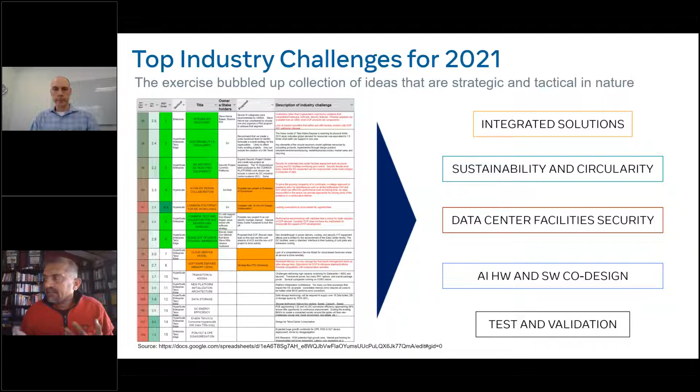So the 2021 exercise led to the following areas. We identified developing integrated solutions as one of the areas where the community should work, because OCP adoption is very important. Sustainability, circularity, and then data center facility security, and a few others. I'm here to talk about sustainability and circularity.

So the main goal here is that we want to move towards science-based targets for alignment with the Paris Agreement and try to build sustainable data centers which are aligned with the global protocols. That's the bottom line. Because when you look at carbon emission, data centers are one of the big carbon emission contributors for any of the companies which are running these data centers.

So carbon emission is identified as scope 1, scope 2, scope 3, which are just 3 different ways in which company operations lead to the bottom line of the carbon accounting which the company is responsible for, and running a data center operation becomes one of the big factors.

So the idea which we are pushing with OCP sustainability and circularity is, first, we are in the first year of getting this launched, so we want to start promoting awareness about this particular area. Many of you attended the OCP summit last week, and sustainability was front and center. This is in great part due to the work which this work stream has done. Next, we actually want to start doing something concrete.

We want to identify key steps in component design which basically make products reusable. So let's say you are designing a timing card: can we make sure that we follow certain design principles which make this timing card life cycle longer than 3 to 5 years? It can be reused in many areas, right? That leads to a lower carbon footprint.

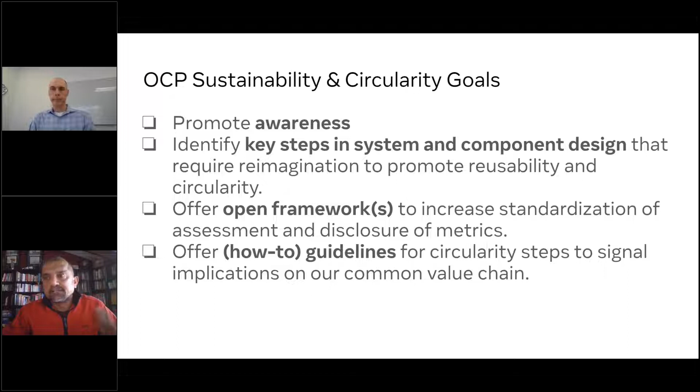And then we also want to look at the way we do the measurements itself. Life cycle analysis is one of them. Hardware efficiency analysis is another one. So these are all the goals which we are working towards. And in 2022, this is going to become a full-fledged project. So, OCP sustainability and circularity initiative milestones.

In 2021, we started the work, and then we went through the whole year leading to a big launch at the November summit, where over 14 presentations, multiple panels, and companies from Google, Microsoft, Meta, and everybody else were involved in presenting their outlook, right? So that's one of the areas which we worked on.

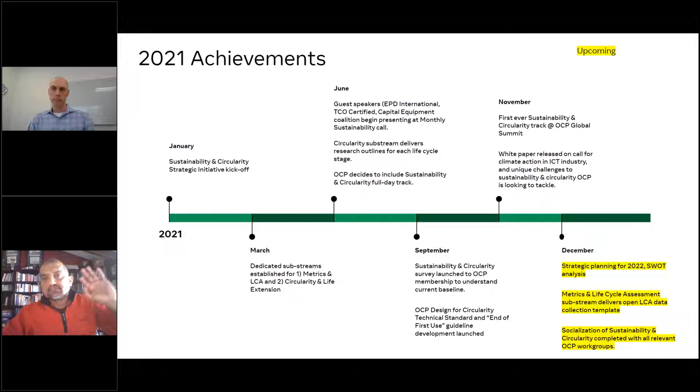And then in 2021, we also launched 2 substreams. We launched measurements and LCA analysis in March, and we launched life cycle extension, which is a way to prolong the life cycle of components, right? So one is how to do the measurements, and the second one is how to make things more circular, and that's what we are working on. So I won't go into this, but this has already happened.

We also published a white paper, which is another first for OCP. This is the first time a sustainability-centric white paper has been published in OCP through the work of a collection of companies. And we are also working to talk to all the project streams across OCP. As you can see, for timing appliance, I've given my name, and we have already completed a whole bunch of conversations with servers, security, rack and power, etc.

And again, the goal is we want to form a tiger team which has cross-project representatives, so that sustainability becomes a very fundamental aspect which all of you think about every time you're thinking of your design. You could be thinking about it in terms of making things circular. You could be thinking about how we can do the measurements which can help in sustainability. So those are the things which we are looking at.

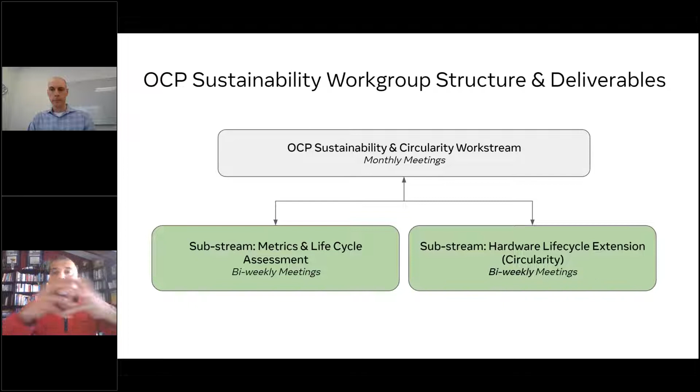And then very quickly, the overview of the work stream itself. As I said, there is metrics and life cycle assessment, which happens every 2 weeks. Similarly, we have a circularity work stream, which happens every 2 weeks. And then we have an overarching monthly meeting which brings everybody together. So it allows for cross-pollination across all of them. And each of these work streams has specific goals and objectives which we are working towards.

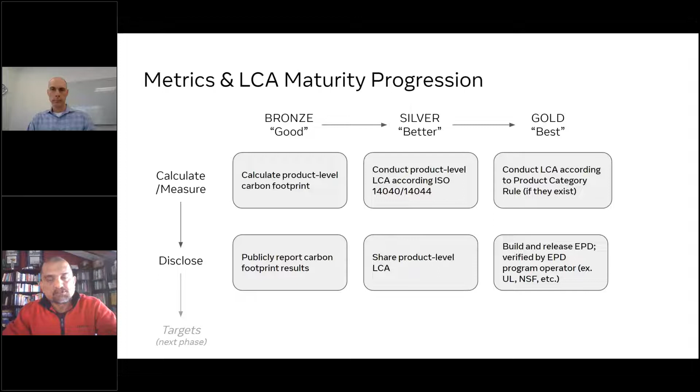And eventually, we want to bring sustainability in as the 5th tenet within OCP, which will be a very big step for OCP. As all of you know, OCP has had 4 tenets for the last 10 years, and adding a 5th tenet is not trivial. But we feel very strongly that bringing sustainability in as a way to measure all contributions is very critical, and that makes everyone think about it. So in 2022, that's one of the goals we are trying to achieve.

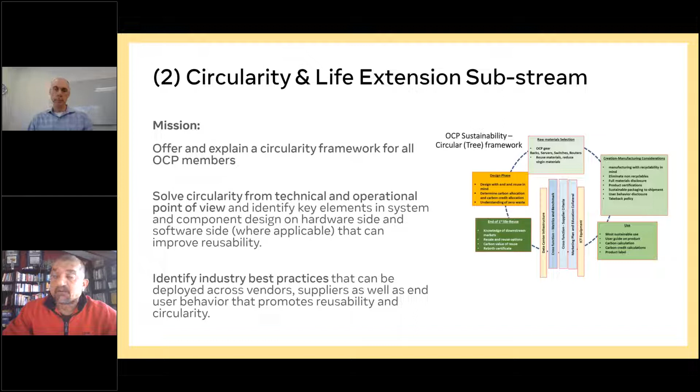And then we have certain goals on each of these work streams which we are already working on. And the idea again is that we want to start forming a tiger team from each of the projects which are running, so that we can collectively start feeding sustainability as a core idea across projects.

And also anything which we are working on, we can take advantage of the knowledge which you have to see if there are things you could contribute into it. How do you do a better measurement, or how can you do extension through circularity? Perhaps we can leverage that cross-functional knowledge. So that's basically what I wanted to share.

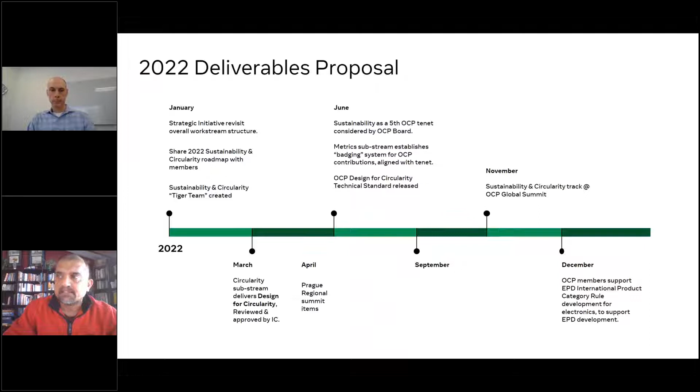We also have a goal for 2022. As I mentioned, we are planning to make sustainability our 5th tenet, presenting it to the board by the middle of next year, and then work longer term so that we can all achieve net carbon zero by 2030, as many of the organizations have. So I wanted to stop here.

I wanted to take this opportunity to share that this particular work is happening in OCP. It's a cross-functional work, meaning it's not a work like server, which only deals with server design, but this is sustainability, which is like security or hardware management, which spans across all of the project areas. So I wanted to take no more than 10 minutes. I'm going to pause here and see if there are any questions.

Thank you, DJ. I have a question. Can I ask a question? Yes, absolutely. Go, Hisham.

So what is the relationship between sustainability and the TAP project? Are you talking about how the TAP project can reduce energy consumption, for example? How you develop the board or the card? What technologies you put into it?

Hisham, this is more like we're advertising all our sister projects in OCP. This is a project adjacent to, let's say, TAP, the same way we present TAP in other OCP projects. Exactly, because not many people know about this project, just like not many people know about TAP.

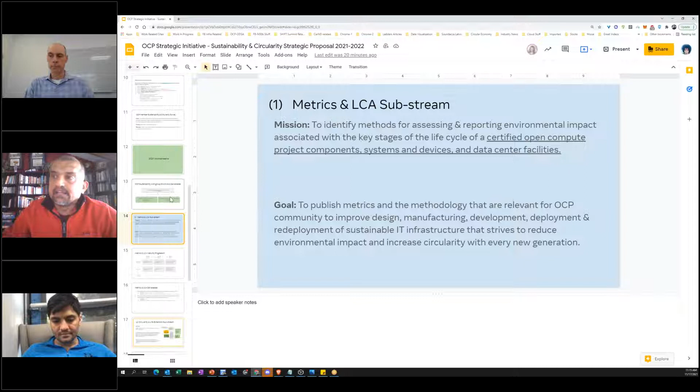And there could be ways in which, for example, TAP can provide technology into a server or a networking device. Similarly, sustainability can be considered in the design of TAP-centric products. And it is not just related to energy consumption. As I mentioned, currently there are 2 substreams. One is how do you do measurement? Simple as that. There is no improvement discussion, just life cycle analysis measurement, or efficiency measurements. That could be discussed even inside TAP.

And the second is, how can we extend the life cycle of various devices? These devices could be servers, networking switches, timing cards, which you guys are building, storage servers, or OEM. For any of these devices, how can we go from a 3-year life cycle to a 5-year life cycle, or make it reusable? Meaning, when one company or one data center decommissions gear, how can it still be productive in a second life with another set of customers?

And for that, a lot of things have to be thought through in terms of how the firmware transfers, the certificates, security, ownership, because sometimes devices in one data center have software or firmware running on them which is very customized for that data center or that particular customer. Now, when you decom that gear, how can somebody else take advantage of that hardware when they don't have access to the same software or firmware? So those are other areas we are looking at solving. So it's not just about energy.

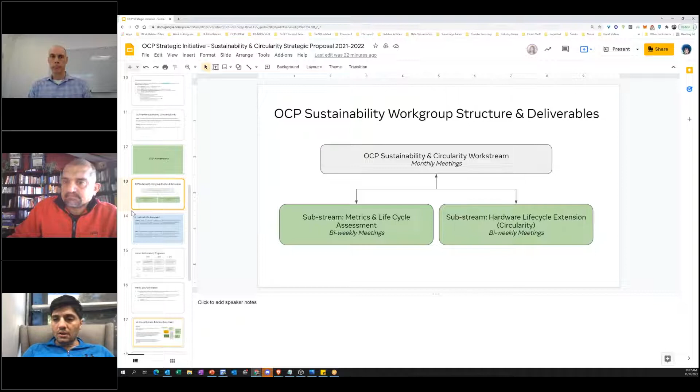So let's go to our third item, where Georgi is going to talk about the API workstream. Georgi, let me make you a presenter. Okay, Georgi, you are the presenter. Your audio is muted. Okay, now it's open. Am I the presenter? Yeah, you are the presenter. Okay. Let me find the slides.

Okay, can you see my screen? Yes. And let me find how to get rid of this. Oh, okay, I think that's good. Wonderful. Let's do it.

So this is going to be really, really short. I had a presentation at the summit. You can go back and look at the presentation. But the goal of today's short announcement is focused mostly on the API side.

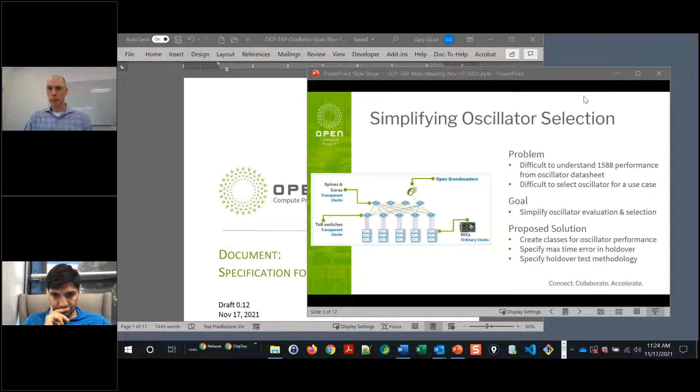Okay, thank you. Can you guys see my screen? Yes. Awesome. Hold on, I need to move the GoToMeeting stuff out of the way. Okay. Minimize, yeah, good. Is it showing as a black box over my shared screen or no? You can see that, okay. It works, yeah. It shows your desktop too. Only on the bottom, right? It doesn't show the GoToMeeting controls. No. Okay, can't figure out how to minimize that. Okay, so let me just back up.

The goal of today's meeting is to give an update on the oscillator workstream. This is a workstream with several other participants from the industry, oscillator and other companies that we've worked with over the last 6 months. And the goal here is trying to summarize what we've done and generate interest, and also to collect feedback, not just in this meeting necessarily, but by inviting people into the oscillator workstream meeting, which is Wednesday mornings at 8 a.m. Pacific time. We'd love to have more people contribute and get everybody's feedback.

So today, let's just talk about what we've done. So the agenda is going to be, why do we have an oscillator workstream? And that's going to lead to a motivation for having oscillator classes, so classification of different oscillators for different nodes in the network. And then part of that is not only the specifications which create these different classes, but the test methodologies used for the test specs.

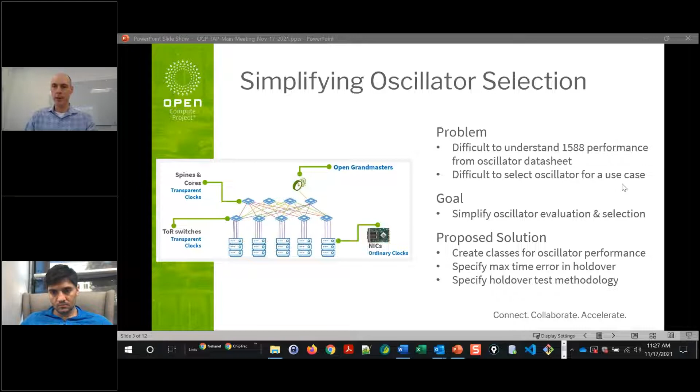It's difficult to select the oscillator class. So we're going to make that simpler by introducing classes for these different use cases. And like I mentioned, not only are we going to create specifications for these classes, but we're going to create specifications for the test methodologies where it's important. And just to give you an idea,

so we have this, I apologize, there's just a lot of GoToMeeting controls I have to navigate around.

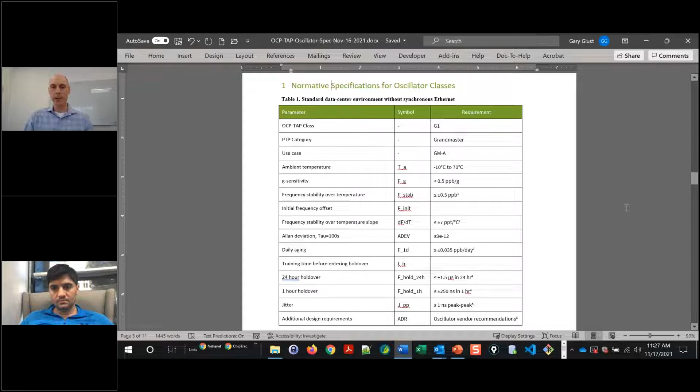We have this document that we're continuously working on, that's the specification for oscillator classes. And part of that document, we have pretty well nailed down that we have a few open items for normative specs for standard data center environment, open grandmaster that doesn't have synchronous Ethernet. And you can see that this is the spec table here, where we call out things like ambient temperatures, frequency stability over temperature, Allan deviation, all the things that you would expect to see for an oscillator specification. And with various footnotes to indicate how these are measured or test conditions.

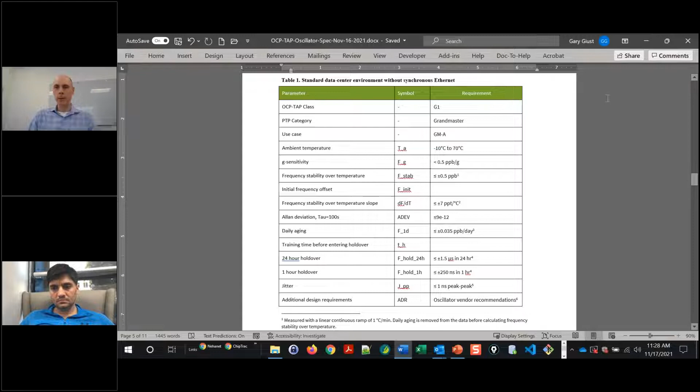Of these test specs, the most difficult to satisfy is the holdover specification, of which there's two. We have a 24-hour holdover spec of 1.5 microseconds and a 1-hour holdover spec of 250 nanoseconds. And it looks innocent enough, but actually when you start digging through what is a holdover measurement and how do you measure it, and we're giving a number here, but there's always going to be some population that falls outside of that. So how do we quantify that? And that leads to the next section, which is the holdover test methodology.

And part of that test methodology is requiring the standard to set different inputs that go into the test method. And we're going to specify those as two separate test specs. One is the test spec for different classes of oscillator. Each one of those classes, which is of course use case dependent, will need to specify what the holdover time is, what the thermal profile for that particular node will see, what the operating ambient temperature would be, what are the ambient temperatures that were required to measure aging and frequency versus time, what is the acceptable probability of error.

So for grandmaster, maybe you require 6 nines, not of accuracy, but 6 nines of the population, so 99.9999% of the oscillators shipped should meet this requirement. And maybe in the ordinary clock, you have a different requirement for the probability of error that the system can live with. But that is very important for us to understand what level of quality we need to ship to. The training time that the oscillator requires before it enters holdover, so that we can get an average frequency for initial frequency offset when we're entering holdover.

And of course, we need to have some sample unit population defined. So we don't want a population of 1. We want something that's higher than that, but not too high that it becomes a burden. So for example, 10 random units for each of 3 lots having a different process and assembly is one recommendation that we have now.

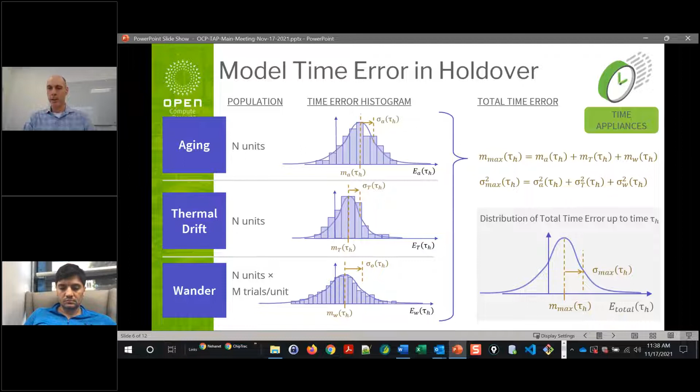And then we can take that equation and we can convert the standard deviation, which is essentially a 1 sigma value, which captures 68% of the population, and we can multiply it by what I call a crest factor, Q of x, and that converts the RMS value into a peak value that allows us to walk down the Gaussian tail and stop in the Gaussian tail at the location specified by the probability of error called out by the class specification for that oscillator.

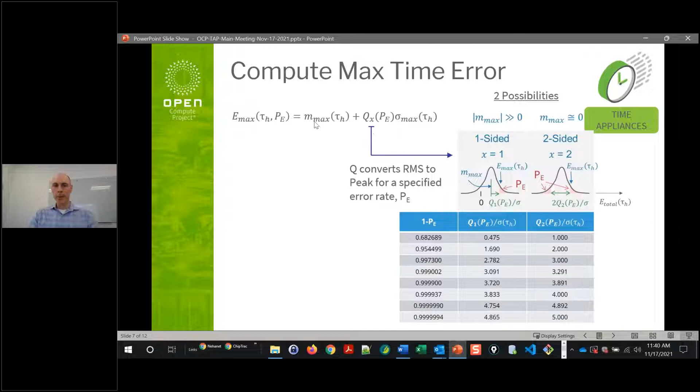But essentially, this is going to be a lookup table based on the probability of error that's called out by the standard and by the particular class. We look up the value. So for example, if the mean is centered around 0, and then we want to look at 6 nines, then we have a value of 4.892. But if the mean of that total error distribution is not centered around 0, then it drops to 4.754. And we simply use that as a multiplier to convert the standard deviation into a peak value that we can then add to the maximum offset, the mean value, and calculate where that Emax value is sitting on that distribution.

The way we would interpret this value of Emax is that, typically in the oscillator world, we characterize holdover on a per device basis. But here, when we're looking at standardizing it, we have to calculate it for the entire product line. So it's ensuring that if we ship lots of units, each one of those units will meet the value of this maximum time error up to and including the holdover time for a given probability of error P sub E. That's really how we interpret that value of Emax.

Now, I wanted to kind of illustrate this in a different light, which is if we're looking at the value of Emax versus time when we're entering a holdover, and this graph begins where we're entering a holdover essentially, we have this dashed line which indicates the mean value of our distribution of Emax. And then on top of that, we can go up plus or minus 1 sigma, and that's these fainter, I guess, purple lines.

But really, we don't want to go out plus or minus 1 sigma because that's 32% error that we're shipping. We want to go out to the specified probability of error called out by the class of oscillator. And for example, and this is just an example, if we're interested in 6 nines of acceptable shipping, 99.9999% of the product need to meet this requirement, then we would go out to this line shown here, and there's a positive deviation as well as a negative deviation. And inside of those 2 solid purple lines, we would call that the window of uncertainty. That with this given percentage of error, 1 micro% essentially of error, we're going to be inside of this window of uncertainty.

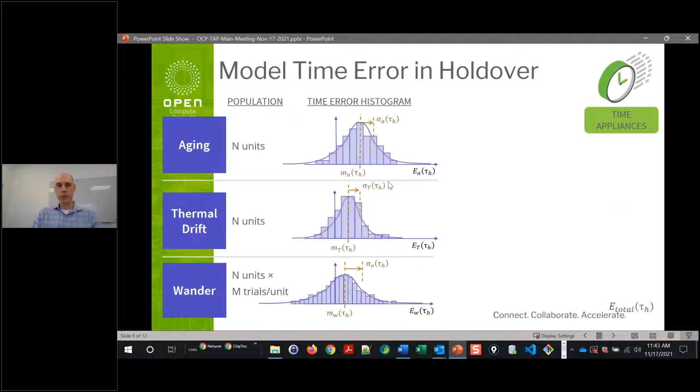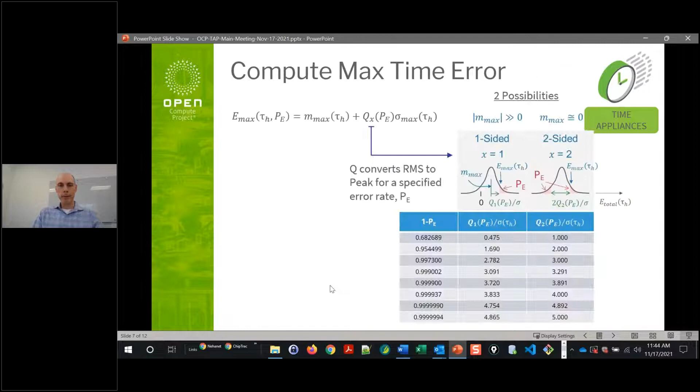So I'm thinking that, and this is really a question for the group here, the way that I started out the discussion is that we're going to specify this Emax value, the maximum time error, up into and including the holdover time, tau h, at a given P sub E. Rather than making that part of the classification specification like I showed you on the Word document, maybe what we do, and this is a question, is here, I'm showing that as the dot. So today, the way I've framed it before this slide is we have this one requirement for Emax at a given holdover time, which is the x-axis value.

Maybe rather than do that, maybe the classes of oscillators call out the methodology that we need to do in order to measure holdover, and then leave it up to the operators or even the application layer to use the information that the network communicates to the application to figure out whatever the application wants to figure out. But we essentially provide these lines here. We provide Mmax as a function of time and sigma max as a function of time, and let the system compute these values based on whatever their requirements are. Anyway, that's just a thought. So that's what I have here.

Rather than spec this, should the spec just require the oscillator vendor to report Mmax and sigma max versus time? And this will allow the specs to not be hard-coded, but to be dynamic. And it provides full transparency for the oscillator manufacturer to provide the world what their device is capable of doing, and then let the world decide how they want to implement it, rather than having a hard-coded spec that may be applicable for Facebook, but not for Google or vice versa. Anyway, that's just one thought that I had. I'd be interested in people's feedback. Any thoughts on that?

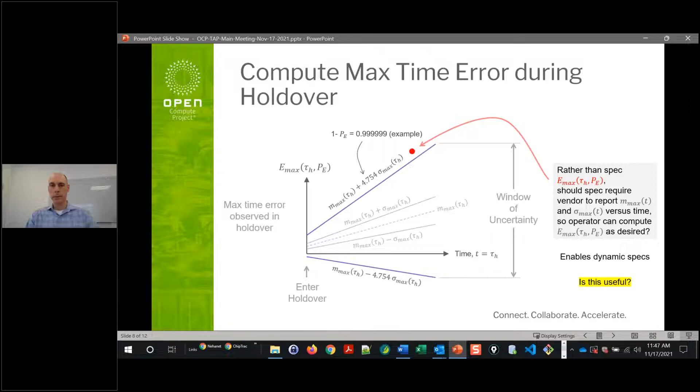Okay, then I'll go ahead and talk about next steps. So in the future, looking forward, we're going to provide the initial spec for the oscillator classes. I'm hoping to do this by the end of 2021. And I encourage everybody to provide your feedback in this process.

And then we're going to revise the specs because we have a limited number of classes that we're looking at today. Essentially, we have one open grandmaster, we have a transparent clock, and we have an ordinary clock set of specs. But I anticipate that there'll be more, and then we'll revise the specification first quarter next year and submit an update to that specification.

And then in parallel, we've proposed this holdover test methodology, but we still need to prove it out with data. We need to show that when you measure the actual holdover of a device and then you predict it based on this model, that the two agree within some acceptable margin. And this is going to be an extended series of tests that we're lining up now. We hope to complete this by the end of the second quarter next year, at which time we would write a white paper documenting the methodology to provide full transparency.

And like I said, we would also like to provide an open source GUI where the community can use it to abstract away all the complexities of the statistical analysis and everything else. You just input the variables that describe your application, you input the test data from the oscillator manufacturers, and you have full transparency as to the capability of that device in holdover. And I suspect it'll take us a month to write that paper, so targeting July.

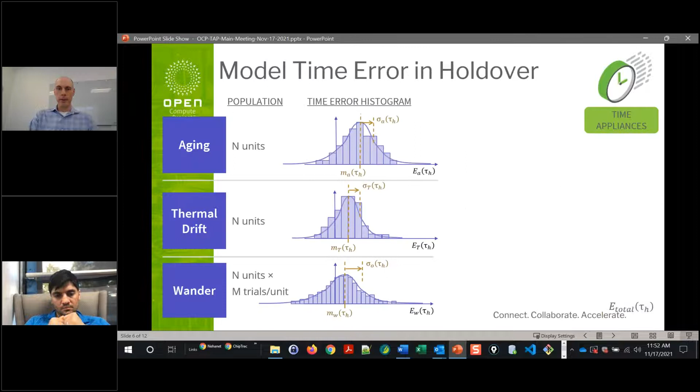Right. The other question I have is, are you defining a loop bandwidth on these things? Because the loop bandwidth and the Allan deviation are going to be critical to defining the frequency going into holdover. Yes, that's exactly right. We do have a parameter that we're calling the training time, and other people call this calibration time or learning time. So maybe training is not the best. Yeah, that's kind of different. That's to let the oscillator meet its stability.

I'm actually talking about the loop rate of the actual disciplining circuit that you're using in a GPS. How often the GPS is updating the oscillator, because that's also going to wind up limiting where FO is going to wind up being. If your loop bandwidth's only 0.01, you're only going to be able to update the oscillator once every 100 seconds, which means you're going to be limited by the Allan deviation at 100 seconds as to how good your loop is. Yeah, so that is wrapped up in what I'm trying to attempt with this tau training.

So there's a separate consideration, which is you need to let the oscillator stabilize over time. That's not captured here. That's just assumed that it needs to rest long enough to be stable. But what this training time translates to in our model is the initial frequency offset, which relates to the average frequency as observed by the servo. So the bandwidth of the servo is captured in here. Right. Well, thanks. That's the only place that it intersects here. And so that'll help us establish the initial frequency entering holdover, which is potentially a dominant noise source.

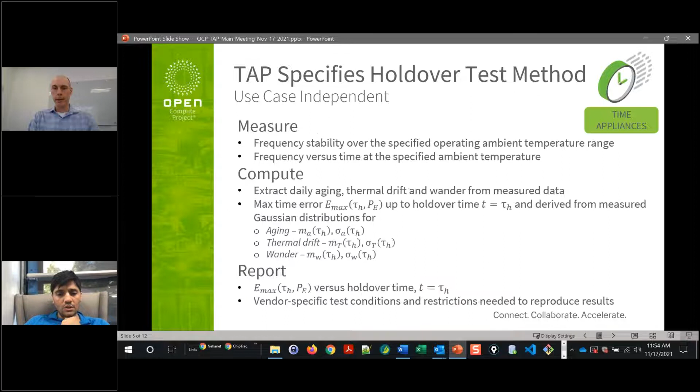Well, one question, Gary, in short, what do we have today as a good scalar to describe holdover? What do you mean by scalar? Like a number that you can use to describe the holdover of an oscillator. I don't think that there's an analog. I think it's just holdover. Holdover is a combination of multiple noise sources: Allan deviation, which you can consider as wander, or thermal drift, or daily aging. Each of these combine in different ways depending on whether it's an XO, a TCXO, an OCXO, a double OCXO, or atomic clock. I don't know that there's a proxy for holdover other than holdover.

No, I don't mean a proxy. I mean, given oscillator 1 and oscillator 2, you want to have a quantitative comparison. And not only do you want to do a comparison, you want to basically put them in a scale. So what would you suggest today as a scalar to describe that? I think what other industry standards have done, like the whole stratum levels with the telecom industry, is one attempt to do that. Is that closer to what you're referring to?

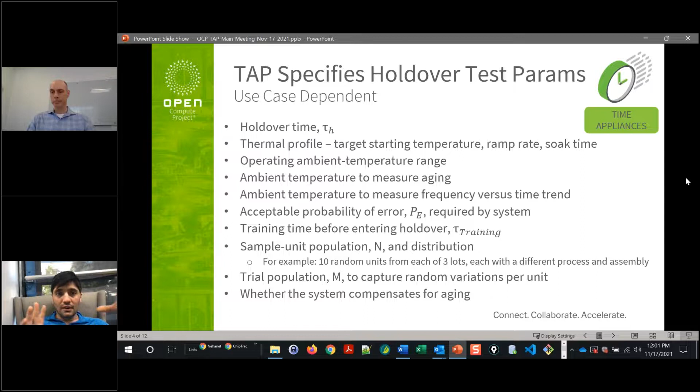I think for the group it would be useful to cover a lot of the ground on SyncE and synchronization. Initially, I was going to do a little bit of results from the tests, but it's early in the process, and it might be good to give a backgrounder on SyncE and synchronization in general and how it might apply, and hopefully with feedback from the group, maybe later on do some practical results.

There's a lot of activity going on, so maybe it's a little too early to go into the practicality, and just see how SyncE might fold in nicely with what Gary and team are doing in terms of the references. Do we want to use some of SyncE, all of it, none of it? Hopefully that gives people a good backgrounder on what's going on there and is useful.